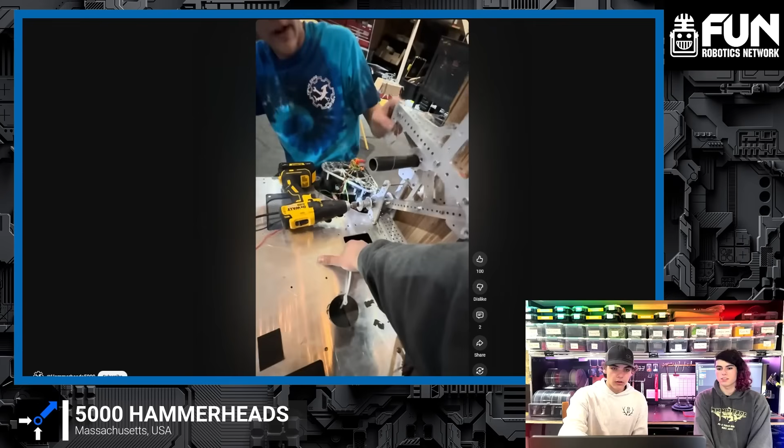Coming up on the FRC Open Alliance show, it's 5000 Hammerheads out of Massachusetts on to give us their updates on what they've been working on so far. We'll be diving into their prototyping with their climber and turret, and diving a lot more into their CAD process right now. You're going to see a screen share showcasing what they've come up with so far from their frame, indexer, packaging, and different coaxial stuff as well.

And then we're going to be diving a little bit more into their code and what they're working on, specifically in shooter calculations and a really cool simulation to show as well. So let's learn about their progress coming up here on the FRC Open Alliance show.

Let's welcome into the Open Alliance show. It's 5000 Hammerheads coming in out of Massachusetts. Welcome, everybody. We're excited to talk about your progress. Been some great stuff in your build log, I know stuff with climbers, prototyping, code, and more. So why don't you two introduce yourselves, what you do on the team, and let's hop right into it. Yeah, so I'm Tori. I'm the code captain. My name's Logan. I'm the CAD and build captain.

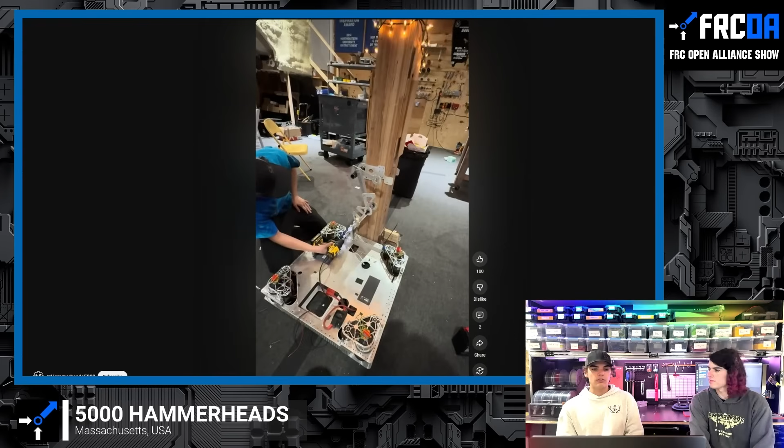So we really got started initially with our climbing prototype because we knew that our robot would have to revolve around the climber, because of how intrusive that would be. We initially started trying to figure out a way to do a dual jointed climber, which would allow us to potentially hit L3, which it did work, but kind of. And then we moved on to a sort of latching mechanism climber.

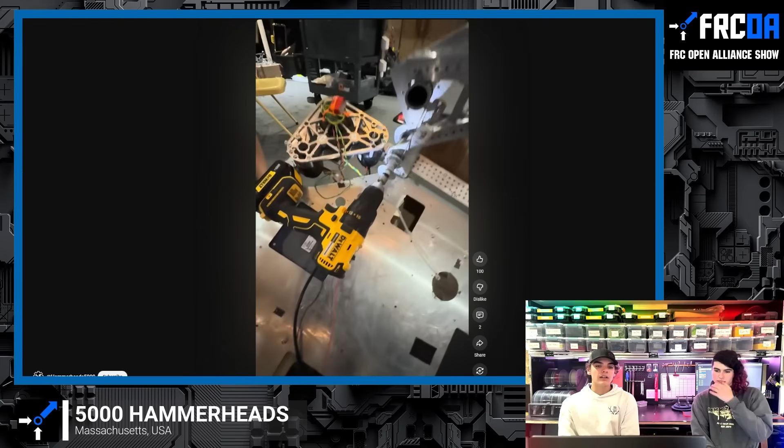After we did this within the first few days, we started to do more strategy analysis, when we figured out that it might actually not be worth it for us to make a super intrusive climber that would potentially hinder the rest of our robot and the performance and the size, because we realized that we would have to stay under 22 inches to be able to get underneath the trench, which we want to be able to do. Especially in auto, throwing off that odometry could be really bad if you're going over the bump. Make sure that we're able to keep our paths consistent.

From there, we began the parallel prototype. We went down this one rabbit hole of trying to do a minimal climber that would be able to use wheels. And you can see it actually doesn't take too much torque to be able to wheel your robot up the side of the tower. However, what we did realize was the amount of time it would take to align and get yourself perfect on there. So we decided to pivot away from that and go with some more non-intrusive climbers, which I will show in a bit on the CAD.

From there, we went into turret testing, where this is a video of us last night, and we began to get that turret going. When we initially started prototyping it, we did a 3D printed little jig, and we actually kind of nailed the compressions first try. I think I sent a video of that too. Oh, did you? Yeah, of the initial kickoff day, we got that first try. Crazy good guess by Logan, I think. Yeah, so we got those compressions right.

So then immediately the next day I CAD'd up our turret, and we got it so we could get it cut. So right now we just have the physical hood and stuff like that mounted onto a test jig, but we also have the rest of the turret stuff for once we begin building the rest of our robot.

So right now that's our rendition 1 of it. By our first competition, which is week 3, we are going to do a full redesign of it, make it slightly shorter, make it fit better into our robot. But this will allow us to have something so we can focus on the rest of our robot while still being able to get testing with code.

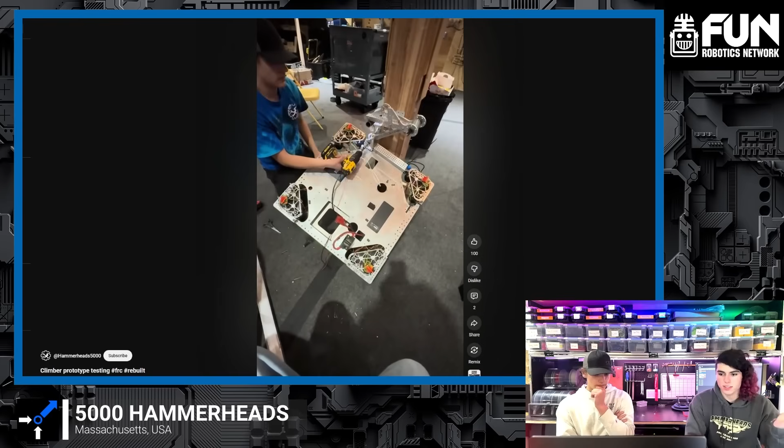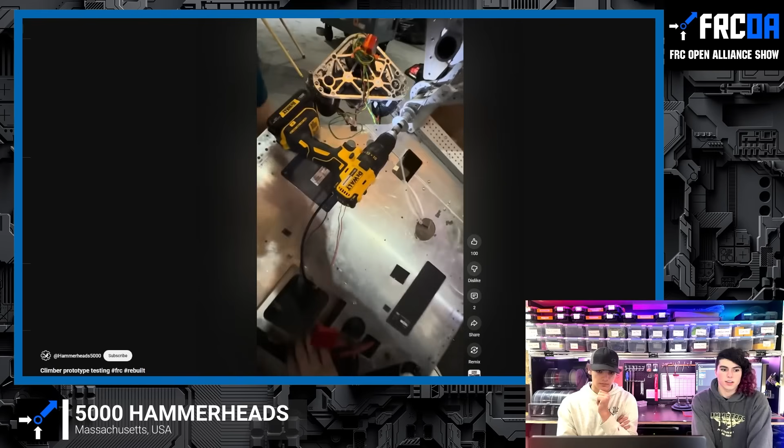Yep. And the point of it is you can get 15 points at the end of auto, 10 points at the end of teleop. And if you have 2 robots that can do that, then you get a ranking point. And it would take up so much less time than getting up to L3 that it really makes it a whole lot more worth it.

On that note, we went down a whole rabbit hole, which we still might go down in the future, of using a gas strut to be able to climb, so you could do a post buzzer climber. This was inspired by 88's climber from last year, where they had a gas strut that they would winch up. It was about a 700-pound gas strut.

They would winch it up, and then at the end of the match, when your motors were disabled and all power was cut, it would release the gas strut so you climb after the buzzer ended. I have geometry that would work for it, but we decided to put a pause on that right now and just go for a super fast regular climber, which I'll show. I can get into the CAD.

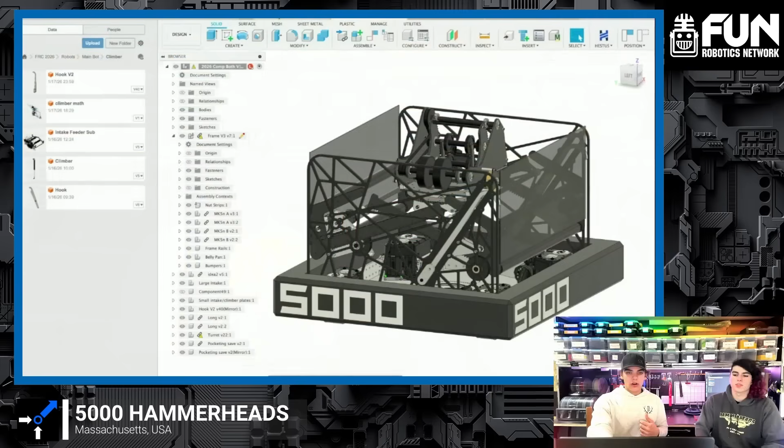Or did you want to talk about prototyping a bit more? We'll do that with CAD. Oh yeah. So CAD. One of our biggest things for our robot was that we want to have 2 intakes. That is, in our opinion, going to be really advantageous. It'll be a huge strategic advantage.

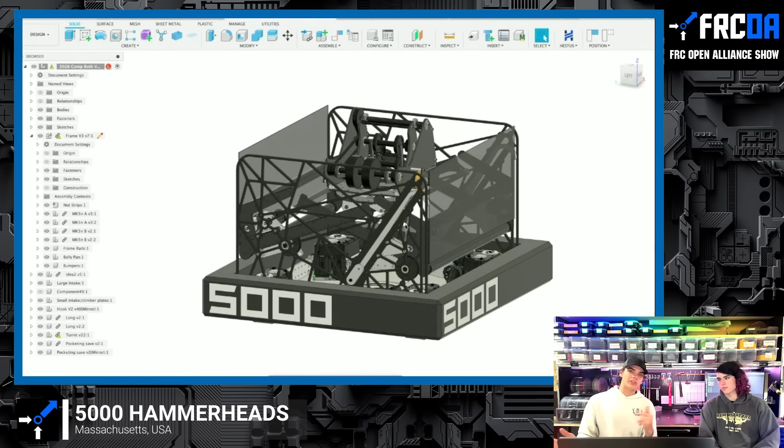There's going to be so many balls on your side of the field. Being able to intake without rotating your robot more than 90 degrees is going to save you a bunch of time. The other benefit is it gives us a dual expandable hopper situation, which we'll get into. But you can only extend one at a time, so you kind of get the same thing.

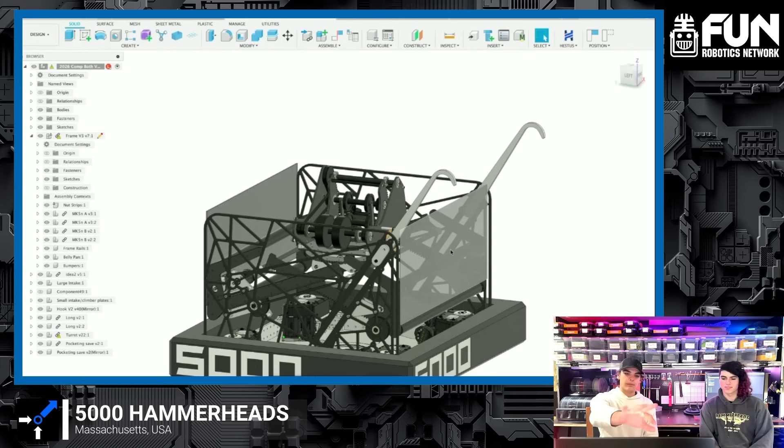The climbing stuff, our current plan is to have hooks that pop out. We just prototyped and tested this about 10 minutes ago, and it does work. Hooks pop out using some surgical tubing, and then you winch them down when you climb.

We're also going to do some latching mechanisms such that it'll latch in place when you do a full climb at the end of the match, so you can hold your robot in place. But at the end of auto, it won't fully latch in. That way, by the time teleop starts, your robot should hopefully be back on the ground.

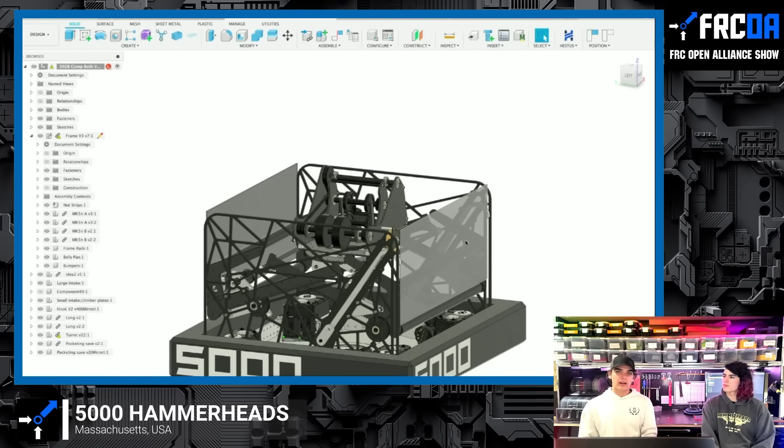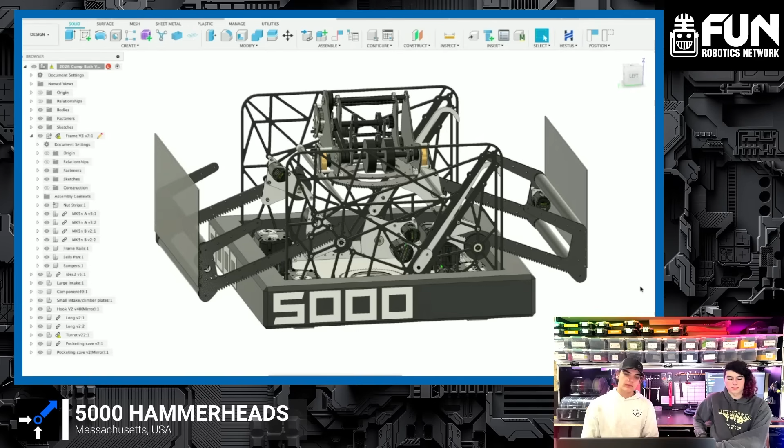So now we'll get into the general design and what we do with it. For our general design, we have 2 deployable intakes on rack and pinions. These are going to be made out of SRPP. We're going to do some initial prototyping in polycarb because we have a polycarbonate sponsor, so that's free for us and a lot cheaper. But final will be SRPP because we used that in the off season last season and fell in love with it.

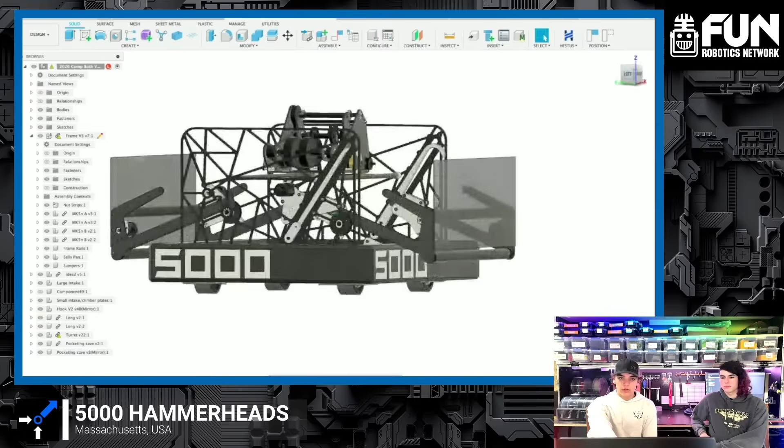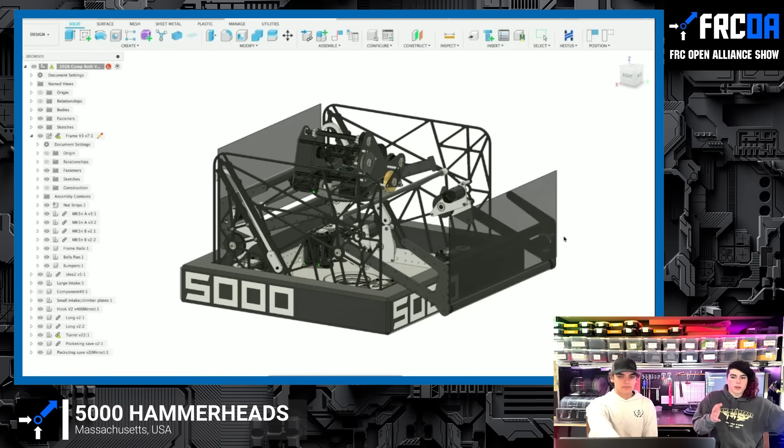They are going to deploy out with some polycarbonate panels on the front, so it gives you a functionally expandable hopper. Still have to do a little more work on the design of the hopper, but it will give us an expandable hopper so we can keep it out and store more. Specifically, what we're using that for is at the end of an inactive period, or at the end of auto, we're in the center and we're coming back. You open one intake and keep the other closed, no matter what. You just fill up your hopper and you have that expanded space, so when you get back to your side and the active period starts, you can shoot more balls than you would if you were confined to the initial robot volume.

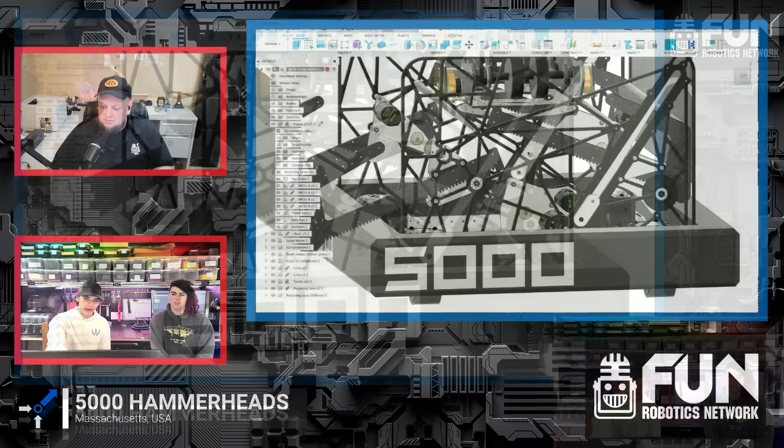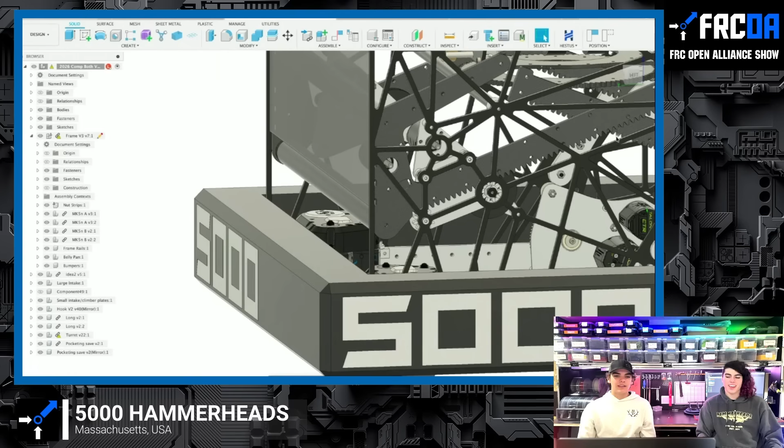What sort of material are you looking at using for the rack and pinion area of the arms coming out? That's going to be all SRPP. Okay, cool. It's modeled as carbon fiber, but SRPP looks very similar, so that's why I chose that material. It'll be super durable to side impacts, which is really important, while also being rigid. Part of the reason we did a linear slide is because if we take a head-on collision, it's going to backdrive the motor more than put stress on the material, ideally. That was an issue we had last year where I would ram the intake into the reef a lot of the time, and that was not great for the intake's integrity.

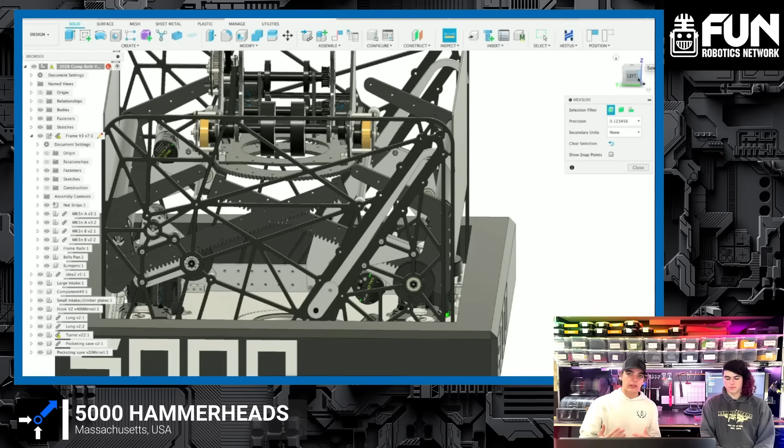Another benefit of our rack and pinion is how tightly we're able to package everything. You can see between the 2 intakes and the climber, it ends up only taking about 1.5 inches of the robot space. I can get you the exact number. About a little bit less than 1.5 inches. Very slick packaging on that. That's really cool. So everything's super tightly packed on the side, while maximizing your internal volume. We're going to be doing a 125 inspired Spindexer idea from Steamworks from 2017, and I'll get more to that in a second. Doing all that will really maximize the internal volume of the robot.

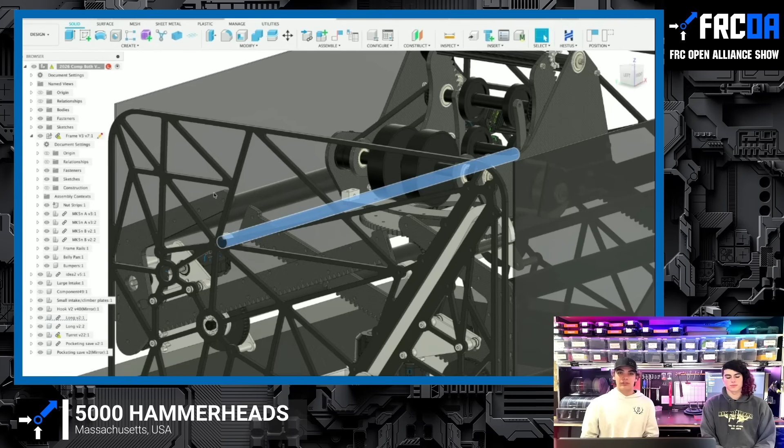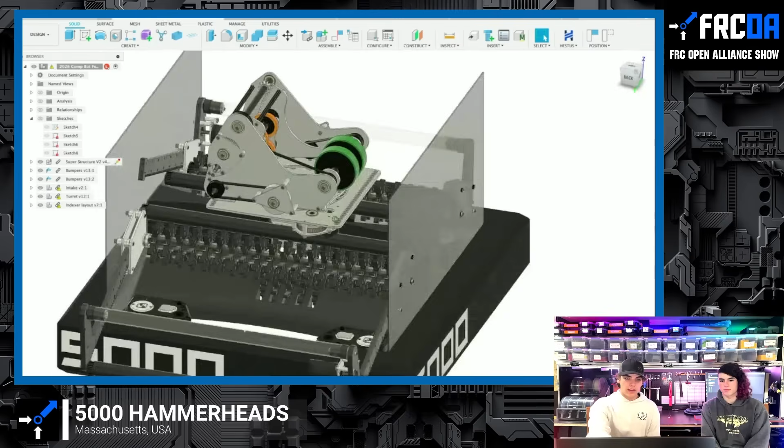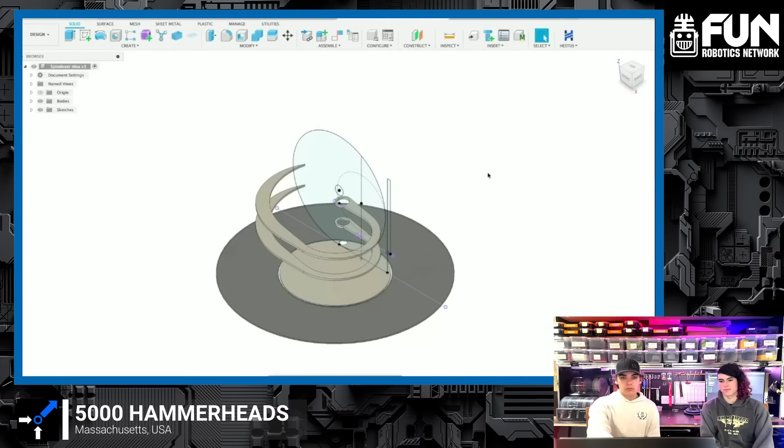Our turret will be mounted onto some carbon fiber rails. We chose carbon fiber because, for the length we needed, it wasn't much more expensive to order from West Coast instead of aluminum. Carbon fiber is really cool, and they're also light, which is helpful. So our turret will be mounted on that with a Spindexer beneath it. Initially we had a similar rack and pinion method with a large amount of wheels fed in using a slope. We quickly pivoted away from that because of the lack of storage space for all of the fuel, and also how it probably wouldn't be as fast. Yes, that too. With the Spindexer, we're working on the geometry right now, but it should work with a 21-inch diameter drum.

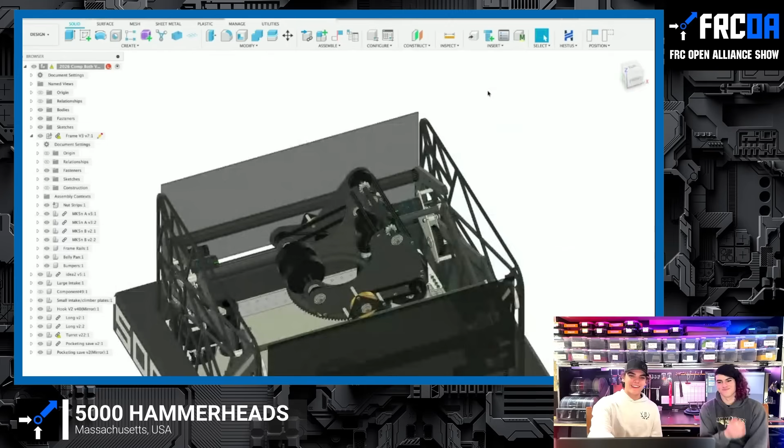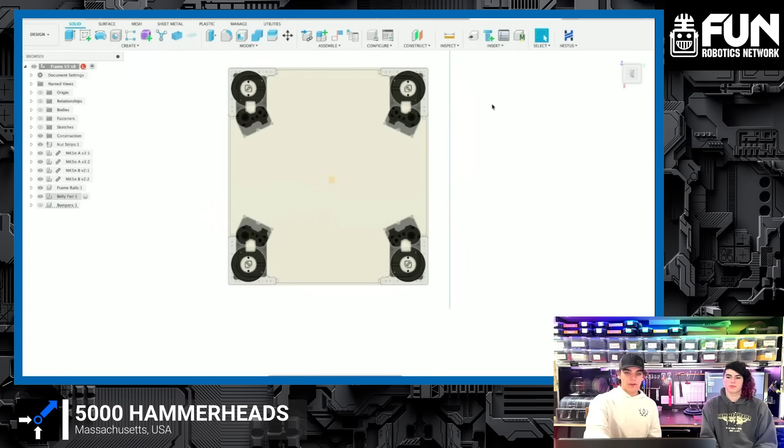That led us to choose a weird frame size of 28.75 by 26.25. Something teams are actively questioning is that instead of a standard box tube frame, we're doing a 1/4-inch machined frame. It allows much tighter packing of everything, including the rack and pinions and the climber, while in theory giving us the same structural integrity. We plan on adding a diagonal 1x1 cross support through it, creating a giant triangle, giving us room for mounting our Spindexer in the middle while keeping everything super low.

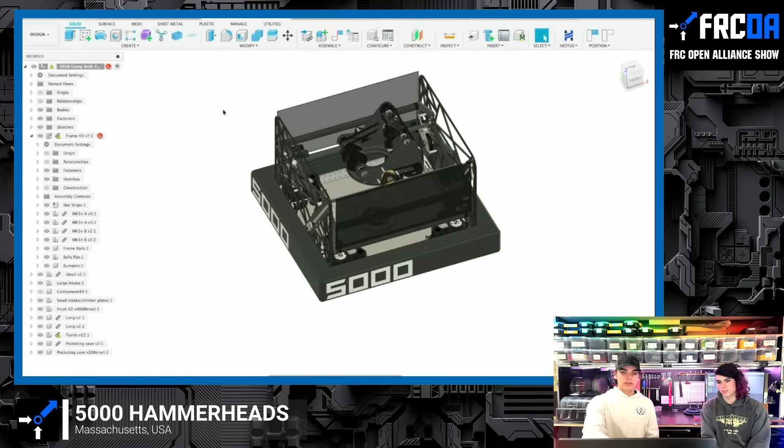The name of the game this year for us has been integrating as many mechanisms together to be able to maximize internal volume for the fuel, while also still ensuring reliability and upgrade path.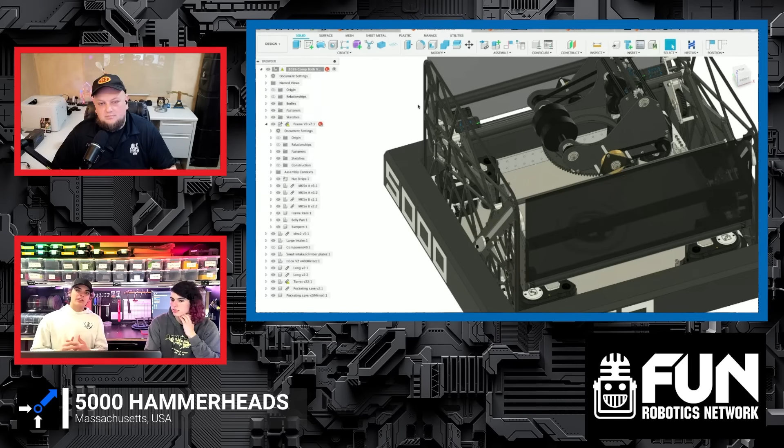So before we get into your shooter itself, and then of course I want to dive a bit more into some of the code work you've been doing too. What is your target fuel per second for that Spindexer? Like how quickly do you want to get that out? So initially we had targeted around 4 fuel per second as a base. And then we quickly realized that hopefully with this new Spindexer, we'll hopefully be getting 8 to 12 fuel per second.

Obviously, we want our limiting factor to be our intakes, not our indexer and our shooter, because the intakes are going to be the easiest thing to upgrade. So making the indexer and our shooter as fast as possible will be the name of the game early on. And then between competitions, we can run upgrades on our intakes to make those things intake faster. At some point, though, there will always be a bottleneck. The goal is to make that bottleneck as fixable as possible.

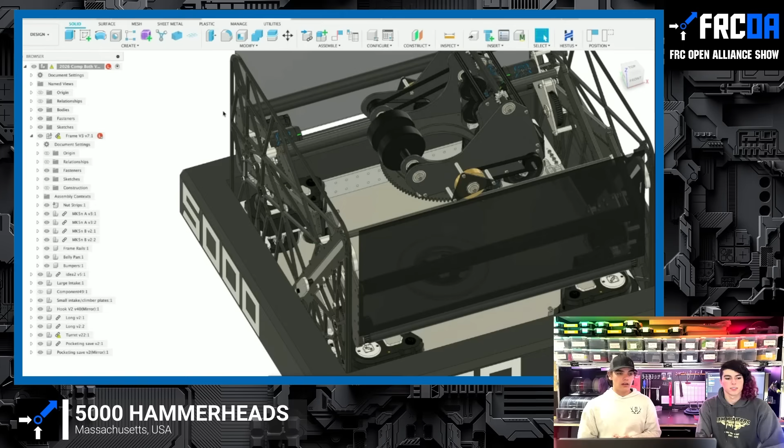With our Spindexer, however, something that we are doing is we are going to be making it coaxial. So this is currently all I have in right now. But yeah, in the off season of last year, I worked on this coaxial turret. I did a lot of talking about it on Chief Delphi, so you can find that. But using these same principles, basically it's like a swerve, but for a turret in this case. Sure.

The same principles will be used for our Spindexer, and then hopefully down the line, with a Rev 3 of our turret, doing the same thing, which allows you to functionally have infinite rotations of your turret without having to worry about a cable chain or a slip ring. The other thing that's important for us with the design is to make it as upgradable as possible while still integrating everything together. So making sure to leave room for potential upgrades that we just don't have the time to research and develop right now.

We're also working on our camera placement. Currently, we are thinking about running about 6 cameras with 2 Orange Pis. Our plan is to corner mount them. So we'd have one pointing out sort of this direction, one pointing out this way, and mirrored, and then we put 2 pointing out to the sides. Hopefully, give us 360-degree field of view of everything around us, and give us the option to not put a camera on the turret.

So to that, we can go over to code, which has a bunch of cool stuff. I guess a thing I want to mention first with the code is that I've been kind of beta testing this mini library I wrote in the off-season called Tunable Controls, which I have posted on Chief Delphi as well. And I found that to be really useful. It basically provides a super simple way to do tuning of both PID and feed forward using AdvantageKit. Because I found in the past that just publishing a PID controller to SmartDashboard can work for tuning the P, I, and D, but then you can't necessarily tune the feed forward values.

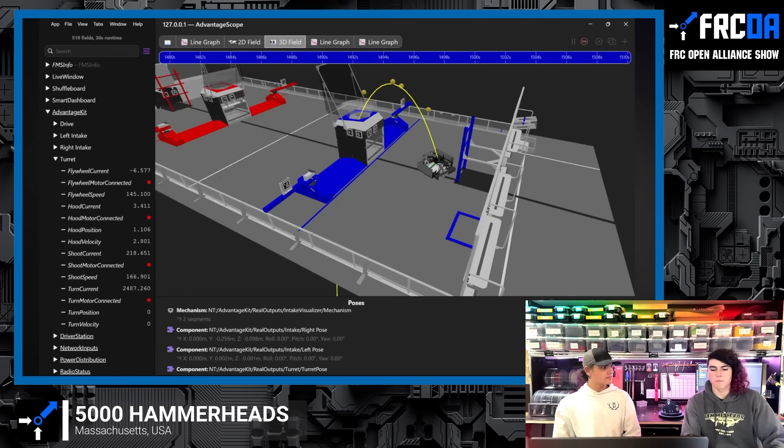And so that has been really helpful, especially just getting this simulation set up. The flywheel PID is all right. Most of the errors when the balls don't make it in are because of that. But I took maybe a minute to tune that because it was super easy to do with that. And that kind of goes into the shooter calculations, which I've been iterating on quite a bit, just mostly using simulation and Desmos.

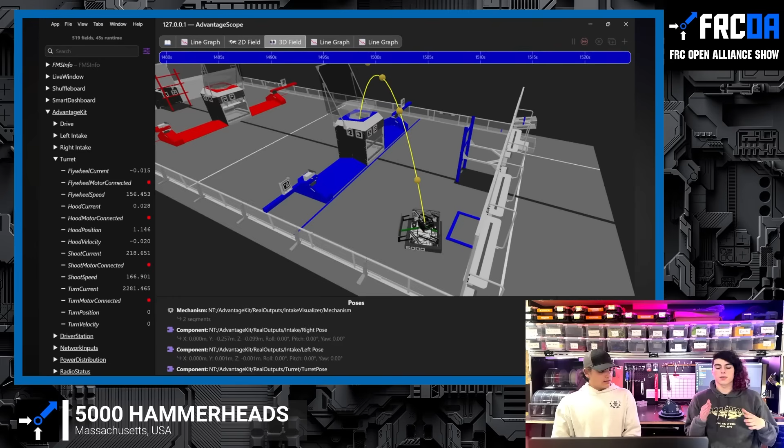Very useful. So initially, we were thinking, and kind of came back to this in the end as well, controlling the arc of the balls through 3 points: the robot, the hub, and then a point that is 20 inches above the funnel. And that lets it be a very consistent arc going into the hub so that we're not hitting the funnel going in, not too shallow, while also hopefully not being too steep of an arc that our balls are colliding in the air too much.

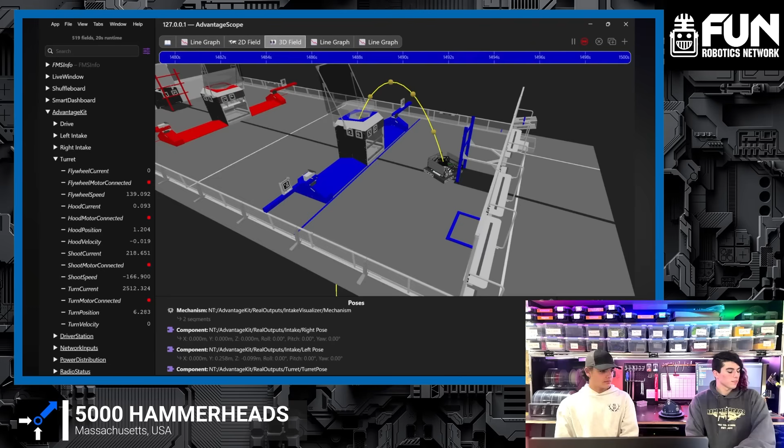So I built that, and then I kind of switched over to trying to use a more or less constant velocity, or not constant, but not fast changing flywheel velocity. And that worked pretty well as well when you were stationary. But then I found that when you tried to move, it required a lot more speed than we had using just the slow moving flywheel. And I realized that I really could get away with changing the flywheel speed faster than I was thinking.

And on that note, another thing that we currently have on our turret is that we can control both the front wheels and the back wheels separately for initial testing. And by the final revision of the turret, I believe our goal will be to figure out the optimal gear ratio for the difference between the 2 flywheels, and be able to actually drive both. Use 2 Krakens to drive both wheels simultaneously, so that way we can have a smaller inertia flywheel on the side and be able to adapt our flywheel speed a lot faster.

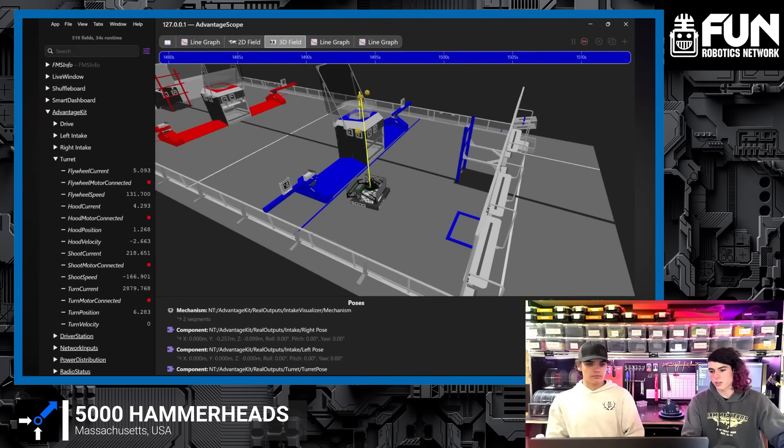Yeah. I guess an important point to touch on is shooting while moving, which is arguably the biggest code challenge this game, I think, because there really isn't a closed form solution to figure out what speeds you should use. So I think what I'm doing, like a lot of other teams, I know Mechanical's doing a similar thing, is using basically a look ahead where it will estimate the time of flight for a stationary shot, and then basically project the hub that far in the future with the robot's velocity, and target that.

And then I think something I'm doing that I'm sure other teams are doing, but I haven't seen any other team doing it yet, is iterating that multiple times. So currently that's going through 3 iterations, but I can change that number. And I found it to be a lot more consistent than just having the one, because the flight time changes when you do the second test and all of that.

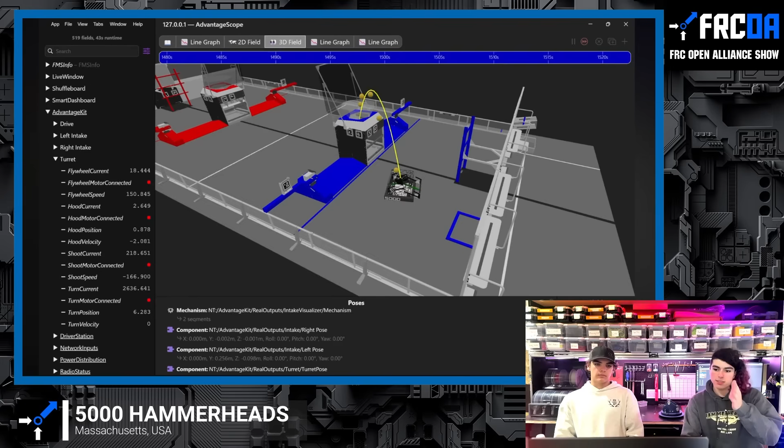But that's kind of in the video of the simulation, that yellow arc is the arc that it's basically calculating that it should have if all of the mechanisms were meeting their goals properly. And then the fuel that's shooting is what they'd actually be doing, just because of the simulation not being perfectly tuned and everything. But I think that's really just been super helpful to have the simulation.

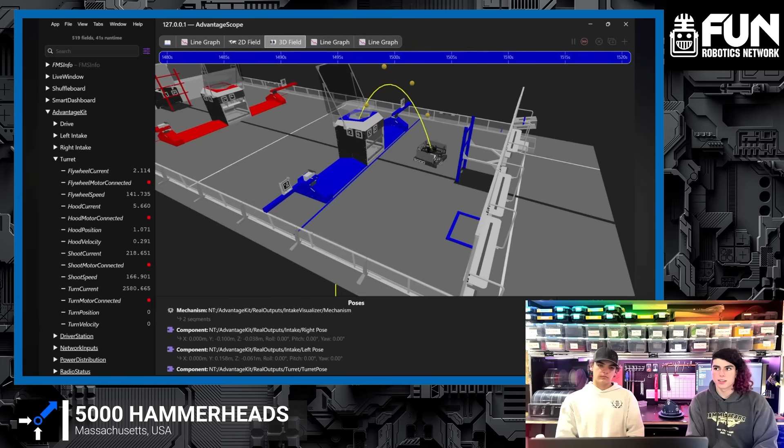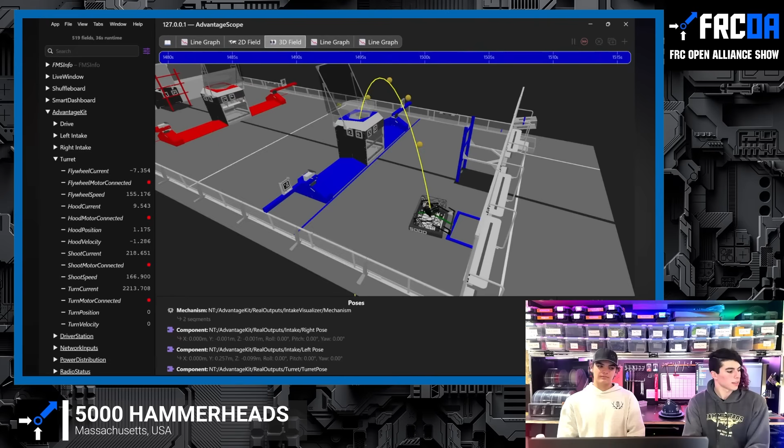It's really something I started doing last year, a bit later in the season, and especially switching over to AdvantageKit in the off season has helped a lot with getting simulation really nice. I mean, I got the 3D model in there, which I really like, but it's not strictly necessary. But being able to test out those calculations, I really wouldn't have been able to do last year until we had pretty much everything built. And this also lets us do auto paths and all of that, which is very helpful.

Well, 5,000, this is a lot of great stuff to digest, I think, for teams to go through, and make sure you are tuning into their build log on Chief Delphi as well to see all their progress. But really appreciate you taking the time. You had some great in-depth things for teams to look through and consider for themselves as well. So we appreciate all the efforts that you put into it.